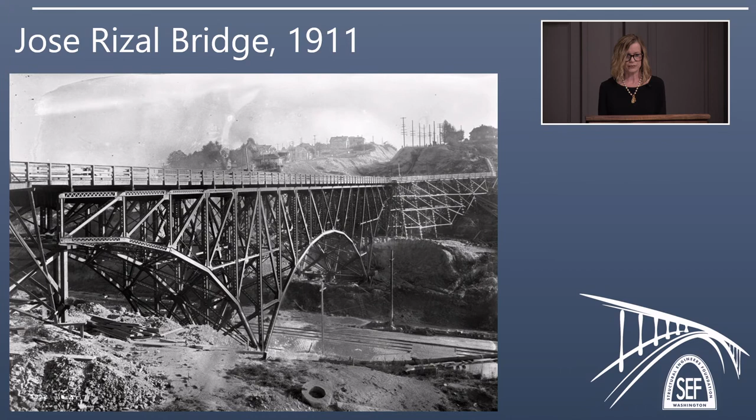Steel was the earliest, but concrete, although widely used later after World War I, we do have an early example concrete road bridge in the Monroe Street Bridge in Spokane. This was actually the third bridge in this spot. There was a timber trestle bridge that stood for a year before burning down, and then a steel bridge stood for about a decade, but it was deemed unsafe. It vibrated and it was sagging in the center.

Now, those two were both high fixed bridges, but we of course have movable bridges, drawbridges, and bascule bridges are the most common type. They are named bascule for the French word for teeter-totter, and that refers to the way that the movable spans are raised and lowered on counterweights. If you've ever driven in a city over a river, you've probably driven over a bascule bridge.

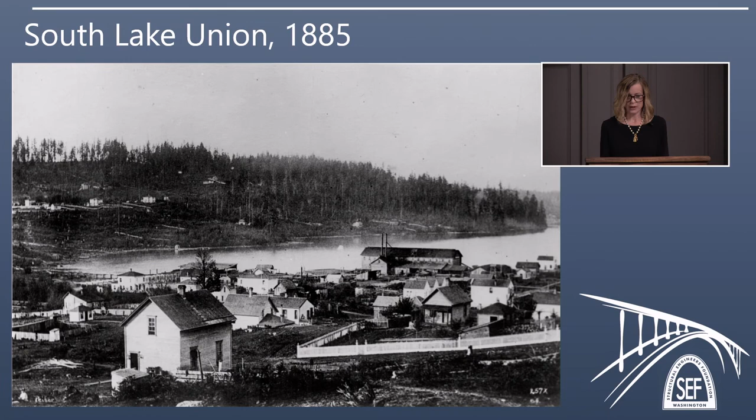The first, Fremont, there had been a bridge at this site since the 1890s that spanned the natural creek that we just saw a photo of, which was the natural outlet of Lake Union. So this bridge was built, this is the second bridge actually, this is not the 1890 bridge. This was built longer to accommodate the canal being dug.

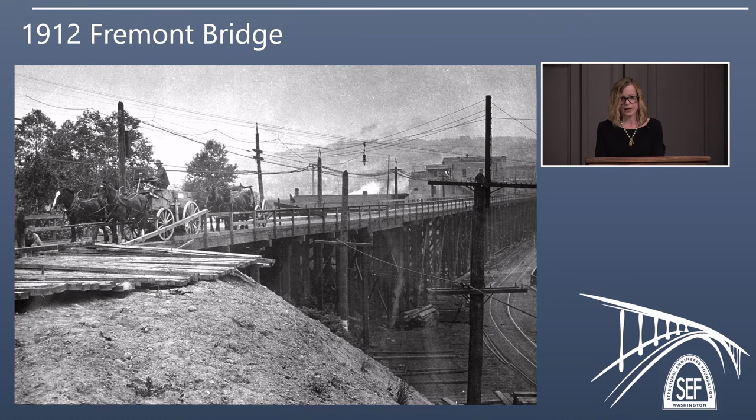In 1911, there was a temporary bridge built at Stone Way that you could see in the distance beyond the bridge under construction here. And it was temporary, but people got so used to using it, they wanted to keep it. They asked the federal government to permit another crossing there, but they said nope, so it had to go. So unfortunately, no crossing there. So 9 months after the completion of the locks, the first bridge was finished, the Fremont Bridge.

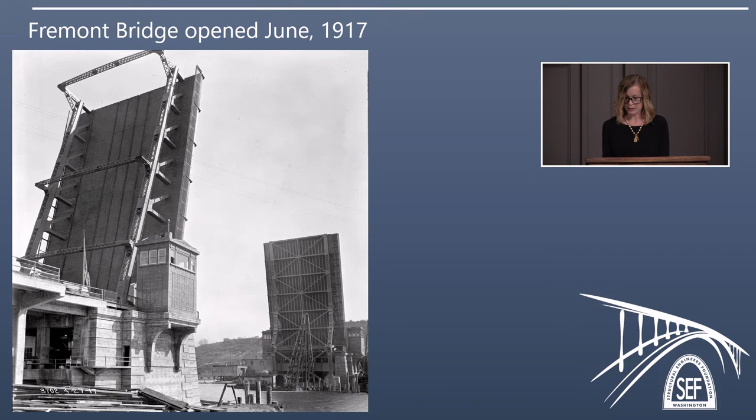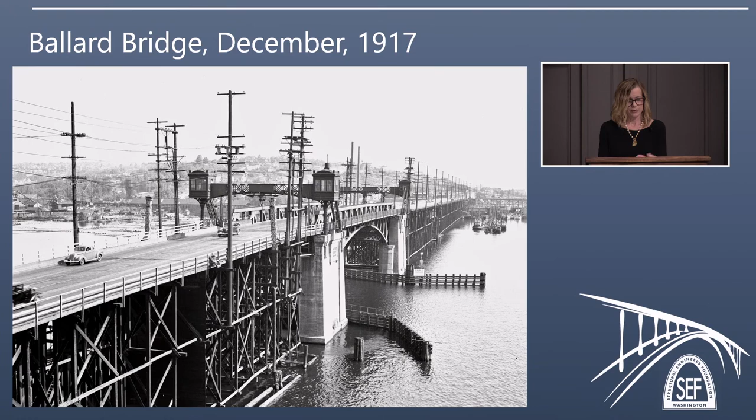So the Ballard Bridge was completed 6 months to the day after the Fremont Bridge was completed. This photo was taken in the 1930s. You can see that there's a timber trestle approach. Those were replaced by the end of the 1930s, but the first 3 bascule bridges had timber approaches until that time. So they were moving along pretty well. They'd opened 2 bridges in 6 months, so progress. However, the University Bridge had a 2-year delay before it would be done. And part of that was controversy over the location.

It replaced the Latona Bridge, which was at 6th Avenue Northeast, and that served an area called Brooklyn, which we now just call the University District, and the University of Washington to the east. And people wanted a bridge that would get them closer to the university. So funding was rejected until they decided on a site at 10th Avenue Northeast, which is where the University Bridge opened in 1919, but that was a costly delay. They had to renegotiate contracts at wartime prices during World War I. So this bridge at $825,000 cost more than the first 2 bridges combined. So it was a costly delay.

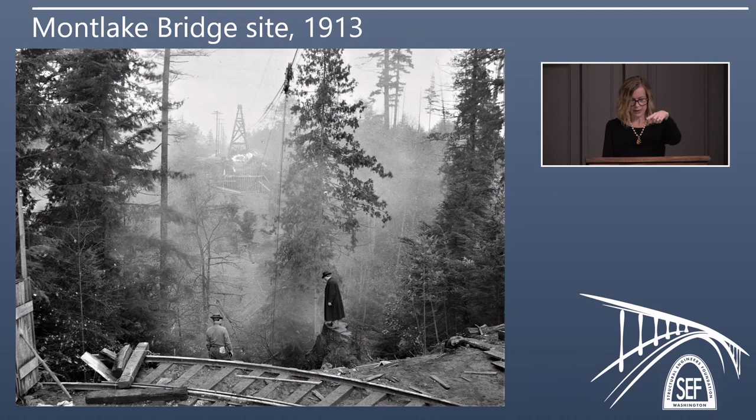So people who wanted to cross at Montlake would have to take a detour of 5 miles, take one of the bridges to come back up. It was very inconvenient. And the area, though, that it served east of the university was growing rapidly. This photo is clearing of Montlake.

Well, class resentment is probably the biggest reason, and that may sound cliche or intellectually lazy, but in 1919, the first citywide general strike in the nation was held in Seattle. So the tension between the working class and the moneyed class and people who lived in these fine homes was very real. And so they had to get creative.

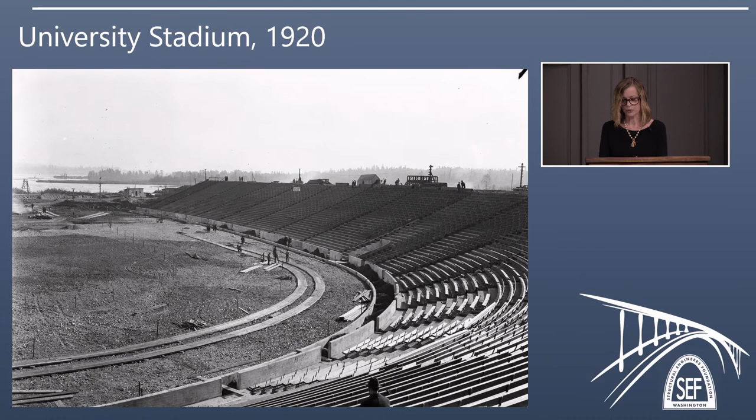So the University Stadium had just been built in 1920. So bridge boosters teamed up with influential Husky fans and promoted it as the Montlake Stadium Bridge. And it didn't pass, a couple more times didn't work, but finally on the 8th try with momentum building for this stadium bridge, it passed in 1924.

So the Montlake Bridge opened in June 1925, proving that you can find common ground to get anything done if you try hard enough. The bridge was stylistically different. The first three were done in a more utilitarian style. This was done in a collegiate Gothic style to match the university buildings, and it was designed by Carl Gould, who also designed the campus buildings. And with the completion of that, it was the completion of a long dream to build the Lake Washington Ship Canal. And John now will talk about bascules.

Oh, thank you, Maureen. That's a fascinating and very interesting description of how we tried to cross that waterway from Lake Washington down to the locks, to the ocean, because clearly that's a big impediment and you need bridges to get over it. I'd like now to turn the page a little bit and look inside some of these bascule bridges and just see how they're built and how they work and what's important to them. There's a few things which are relevant.

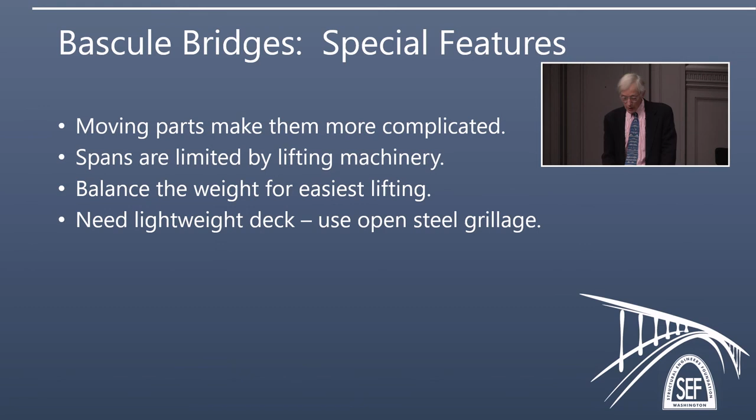One is that they've got lots of moving parts, and therefore in some sense they're like a machine rather than just a fixed bridge. The spans which you can use are also fairly limited by the machinery that you put inside in order to lift them and lower them. As Maureen pointed out, you do need to balance the weight on them, with a counterweight at the back and the span in the front. And of course, the lighter you can make the whole thing, the better off you are, because then the less energy you need to use in all the machinery.

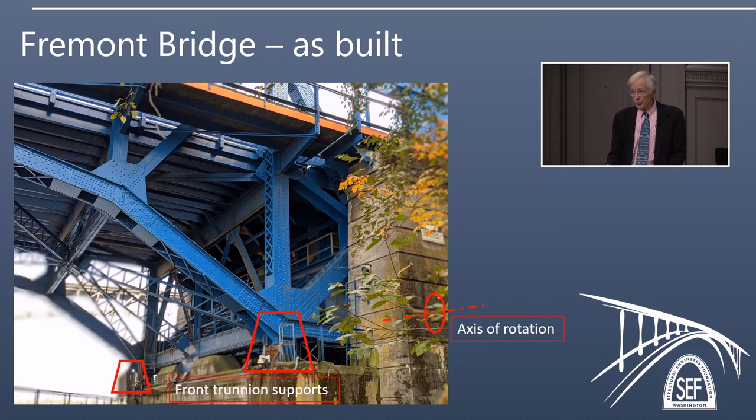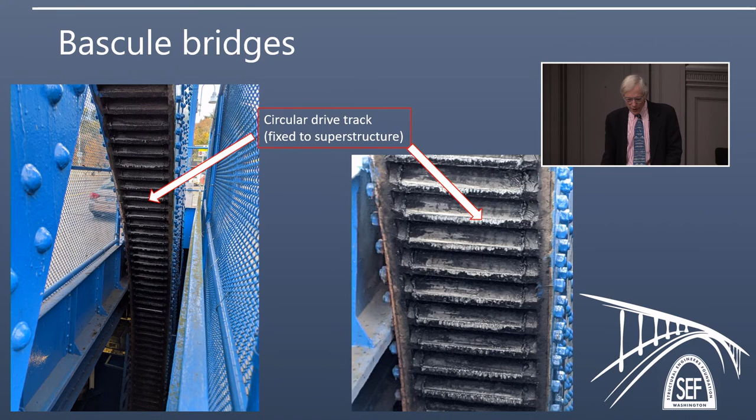parts. You can't readily see inside, but if you drive over the bridge, you can still see the drive track. If you walk across on the pedestrian side, on the west side, you can see these big greasy drive tracks there, and they are indeed the working guts of the bridge.

I think we should take a look at the steel bridge construction in the Bascule era and just see how they made these things. And some of the important technology, when you make a bridge, is that you have to make it in pieces. You cannot just make a whole bridge and drop it in place suddenly. If you make it in pieces, you have to connect them together. And the way you connected them together at the time was using things called gusset plates and rivets, and we'll

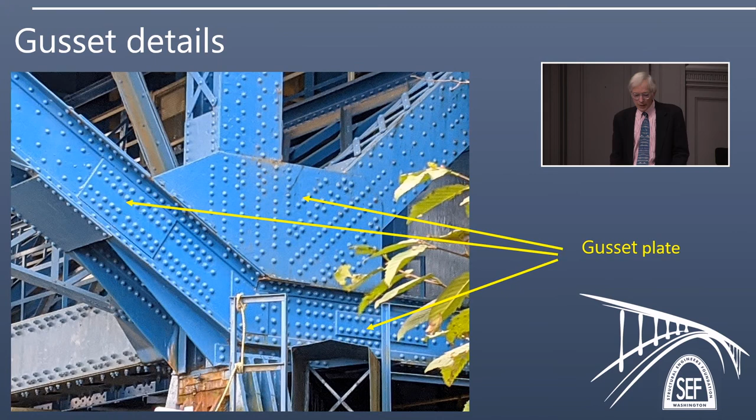And you might think, well, there's only just one, but no, that's not true. There's another little one up here, there's another one down there, and I suspect if we looked hard enough, there'd be a few more in the picture. And really what this goes to show is that the gusset plate business was pretty complicated when you were trying to connect everything together. And all these plates were kind of laid on top of each other in a really fairly artistic, craftsman-like way. So there's really a lot of craft went into building these things.

So the little round things that you see there are not bolts, they're rivets. And we should do a little riveting 101 here, I think, to see how this is all done. If you've got two plates, maybe two gusset plates, that are sitting next to each other and you want to connect them, the first thing you do is drill a hole. Then you heat up a rivet to red heat, cherry heat, and then you put it in the hole.

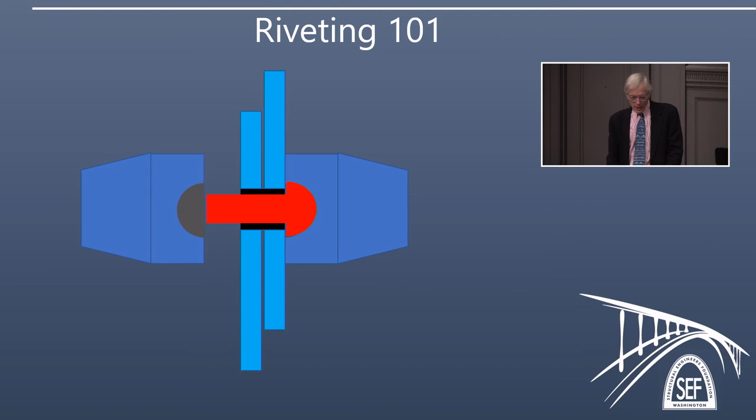Then you bring up a riveting tool, which is a thing like a big heavy hammer which sits behind it on the head side. You bring up another riveting tool on the opposite side, and then you whack it so that you form a second head on the rivet when it's still hot. At that point, you're sort of done. You can take away the riveting tools, and if you watch it, the rivet will shrink as it cools.

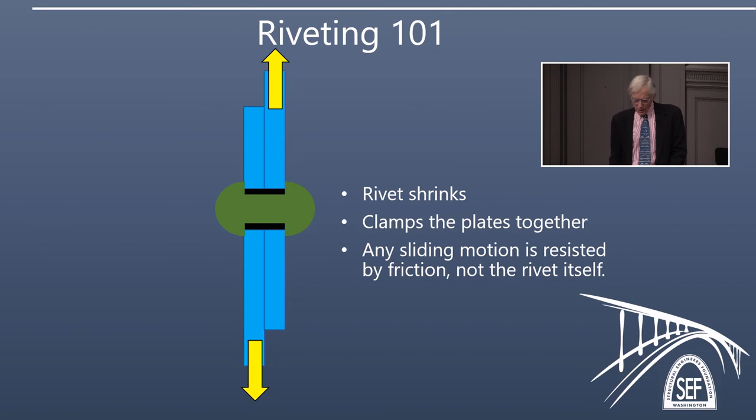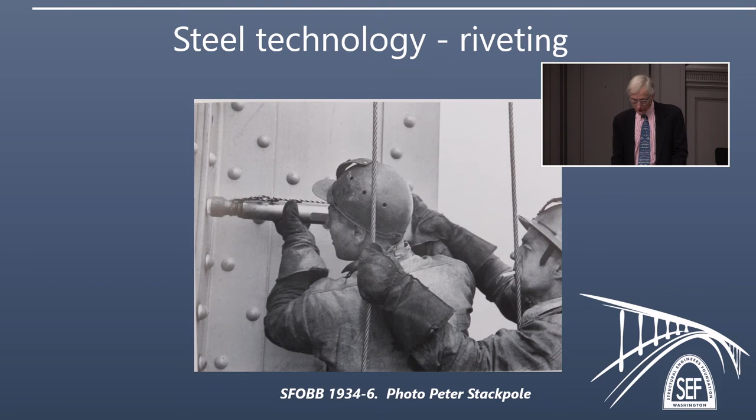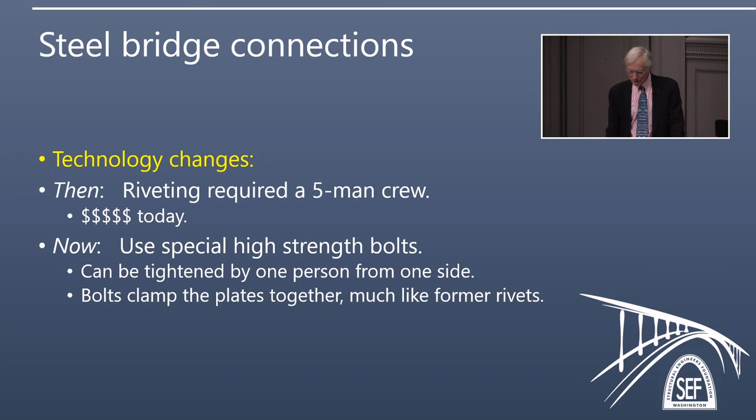Well, if we think about the overall steel bridge design and not just the connections, then there's a few things that stand out. If you're making steel bridges, steel is pretty strong stuff. Therefore, you don't really need very much of it. If you don't need much of it, then the members get to be quite small and skinny. And if you make them quite small and skinny, then immediately you bump into the problem of buckling. So what we find in steel structures is that two of the big problems are, number one, buckling, and number two, the connections. How do you connect the pieces together?

Second thing is, because it's so strong, you really need to put the material only where you need it. And that's why we wind up with configurations like trusses, which seem to have an awful lot of air in them, which is quite true. But you put the steel just exactly where you need it and nowhere else, and that's how you get that configuration. And the last thing is, how do you put these things together?

Well, back then, they put them together in what we would call a stick-built fashion. You bring each individual piece and you rivet it together. Today, it's a more common practice to weld together bigger pieces, to take those bigger pieces out to the site, and then to bolt them together. Because welding is well suited to work in a well-controlled shop, where you've got good weather. Bolting is better in the outside world, where welding is pretty expensive, and particularly crane time is expensive. You don't want to have a crane holding onto a piece for a whole day while you weld it together.

So let's move away then from the bascule bridge world to some fixed steel bridges and just see how they work. And a fixed steel bridge, of course, is a bridge which doesn't go up and down like a bascule bridge does. And a couple of the examples of these are typically slightly later than the bascule bridges were built. They were kind of in the 1930s.

Here's the Aurora Bridge today, and really the thing I'd like to point out here, which may be a little hard to see, is that many of the secondary bracing members here, which don't carry super big forces, are made up of a really delicate lattice work of small pieces all riveted together. And that indicates what was true at the time, which was that basically labor was cheap and material was expensive. And so what that meant was that you bust yourself to try to use as little material as possible, even if it meant making a lot of connections. And that's why you come up with this kind of filigree of fine pieces.

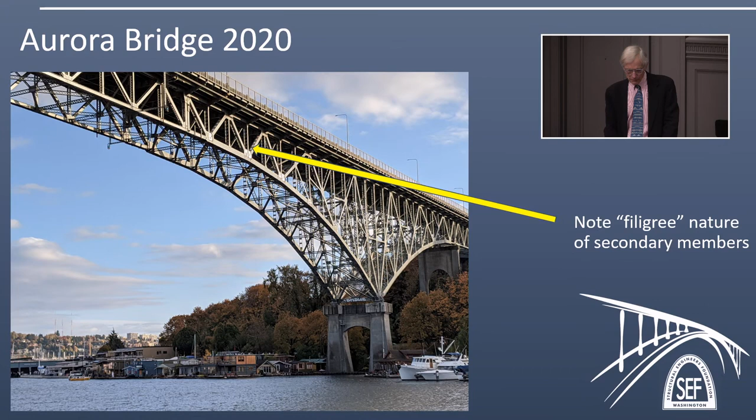I think you can imagine that putting that thing in retroactively meant that somehow you had to pick up the bridge with one hand and then put the bearing under with the other hand and then quietly let the bridge down on it when you were all finished. So just from a construction point of view, that was a remarkable operation.

A couple of other bridges here, Deception Pass, the same kind of era in the 1930s, again built by the cantilever method. And this is a particularly difficult one because the currents under that bridge are wicked as the water flows in and out due to the tides. So if you fell off that bridge, then it was probably a bad outcome.

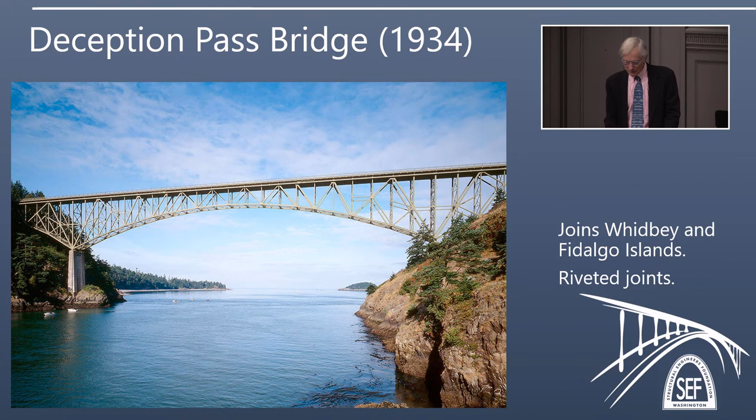So this is, in fact, the longest cantilever truss bridge, continuous cantilever steel bridge in the US, and that is still true today. 1,233 feet on the main span. So that's getting about as long as you can with these things. And we do get another view from what the maintenance crews see when they go up there, and the mist is flowing through on the Columbia underneath.

What a fabulous view. You can notice here also that these secondary cross pieces are not made up of those little spindly filigree pieces. They're made out of solid beams with holes cut in them. And here what we're seeing is that the cost of labor and material have started to switch over, and so it becomes more economical to just take a rolled steel beam, chop a hole in it to keep the weight down, and then put it in place.

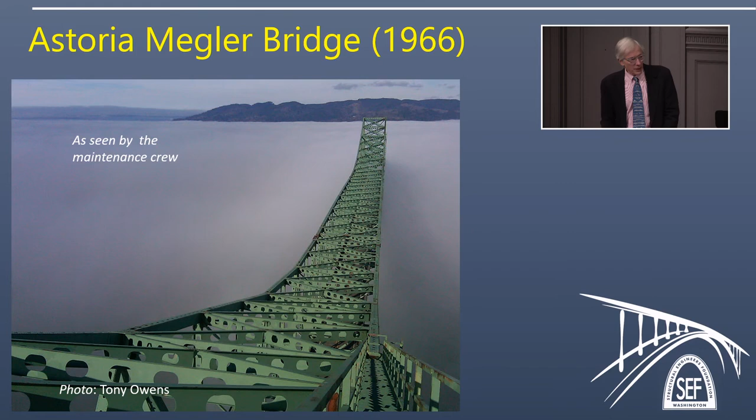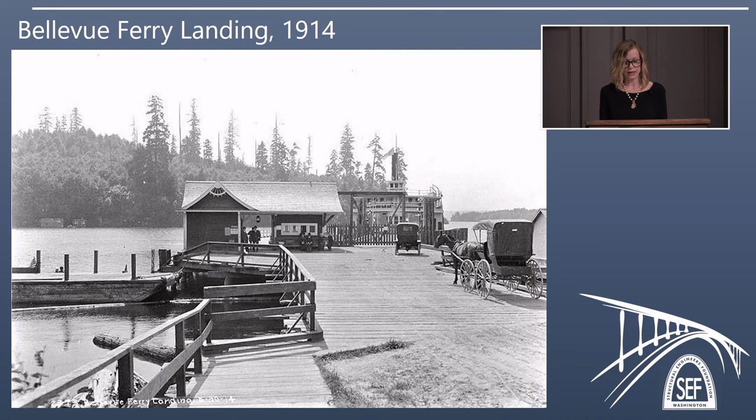And here is a horseless carriage followed by a horse and carriage waiting to get on the Bellevue ferry. If you did have a car, you could drive to Seattle, but you had to take a 26-mile, 1-hour trip around the south end of the lake and back up north to the city. There was no vehicle access to Mercer Island. And the area of Bellevue and Mercer Island were very, very rural. This is right what was up behind that ferry landing.

Farms. The economic center of the east side was Kirkland. They had woolen mills and shipbuilding in Kirkland, but Bellevue was strawberry farms and agriculture, very sparsely populated. After World War I, Mercer Island was considered a prospect for residential developments if only you could get a car there. So they built the East Channel Bridge connecting the northeast side of the island to Bellevue. And this is the same area where the I-90 connects today.

And this did increase the residential population a bit in the 1920s, and there was some interest among islanders for a bridge across the lake to Seattle. But it was problematic. The lake's very deep, muddy bottom, so a traditional bridge on piers is problematic, and there just wasn't enough interest. This gentleman, Homer Hadley, though, he was way ahead of them. He first proposed the idea in the 1920s.

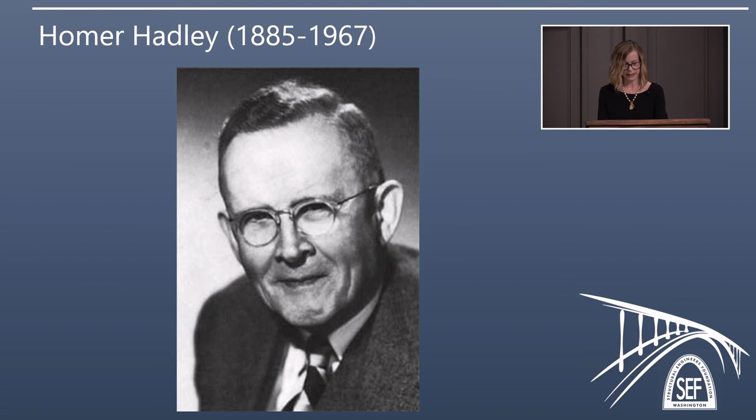war was happening in Europe, and the United States was dealing with the Depression, and Franklin Roosevelt's administration started the Works Progress Administration, and they made an offer to pay for 40% of the cost of the highway bridge, and the rest could be paid off by the state tolling authority. And despite his opposition to FDR and the spending, Hadley saw this as an opportunity to realize his dream. So he proposed the idea to Lacey Murrow, and that's that gentleman there.

He was the director, state highway director, and he convinced him that it would work, and he assembled a team of the best engineers in the state, and this is them posing as the shovel crew. Now, the WPA offer was set to expire by the end of 1938, and they proposed a tunnel through Mount Baker, which of course is where it is, but people didn't want it. People didn't like it. They had the NIMBY problem, and so there was debate over the location, and the federal government said, enough already, build it, or else we're going to revoke funding. So they broke ground on it 2 days before the end of 1938, just in time.

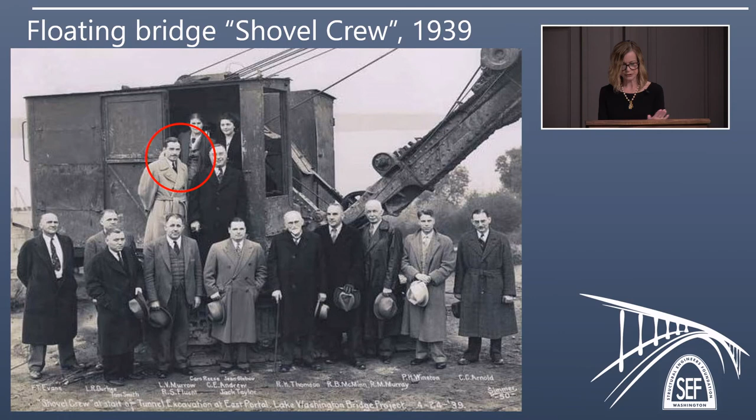But Murrow asked Hadley to stay out of the public limelight of the bridge because of the Portland Cement Association. He would see it as conflict of interest. He said, you'll get credit later after it's built, just keep quiet for now. And it opened in July 1940. Its floating span, 6,620 feet, was the longest floating structure in the world when it was built, and the first floating bridge made of reinforced concrete. And it cut travel time from 1 hour to 7 minutes from the east side to Seattle. And it was a resounding success.

The bridge became an attraction in itself. People would come just to drive over the bridge, but it also sparked a massive amount of growth on the east side, particularly after the war. Between 1940 and 1950, the population and property value at Mercer Island increased 300%. It was so popular that the toll was paid off 19 years early. And in this photo, Governor Langlie is taking a ceremonial last toll from a KOMO News reporter there. But the growth was really concentrated in Bellevue and Mercer Island. And by 1948, Kirkland, further north, wanted another floating bridge to serve their community. But it would be another 15 years before it was built.

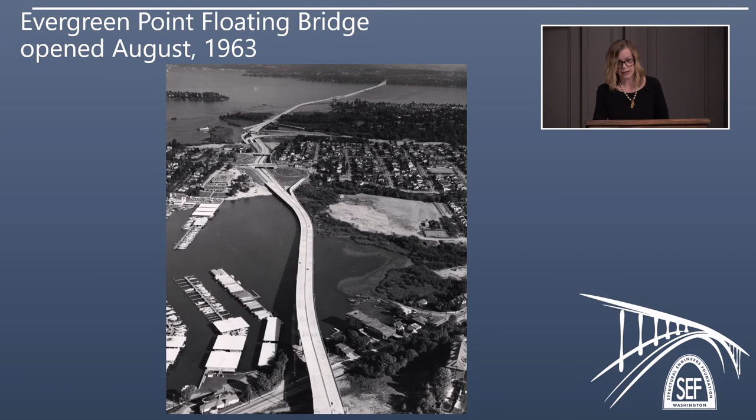The funding for the Evergreen Point Floating Bridge was approved in 1953, but debate over location once again went on and on. It finally got whittled down to two possible locations, one being at Sand Point, and the other at Montlake to Evergreen Point. And this route was preferred by the Navy. They didn't want the bridge so close to Sand Point. And it was preferred by Governor Rosellini, so that's the one they went with. And there's Governor Rosellini with the giant novelty scissors, cutting a standard 1-inch ribbon.

And it did deliver the growth that they had hoped. It paid its toll off even sooner than expected, 21 years early. It was supposed to be paid off by 2000, and it was paid off by 1979. But the traffic relief that it was supposed to have created was totally erased by the population growth. So in 1989, a third floating bridge was constructed directly adjacent to the first one. After that third bridge was in place, they went about refurbishing the original bridge at 50 years old.

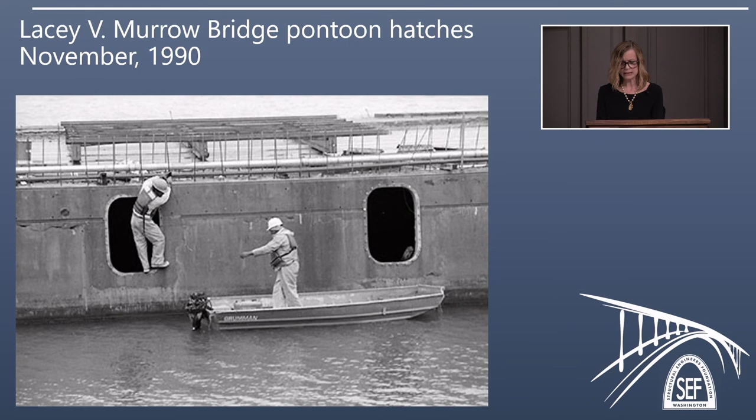They were refurbishing the pontoons, and they left these pontoon hatches, you can see there, they left those open over a Thanksgiving weekend in 1990, and it happened to be a very blustery one. A storm came in, and those open hatches got filled with water. Workers attempted to pump the water out, but it was too late. One pontoon sunk, and then they all went down like dominoes. So the Lacey V. Murrow Bridge floating section had to be completely rebuilt.

So here it is as it is today. You can see on the right the Lacey V. Murrow Bridge, the only original feature being the approach, the steel through arch approach, and the Homer Hadley Bridge, the 1989 bridge, named for Homer Hadley, who finally, 22 years after his death and 49 years after his bridge was built, got his due credit.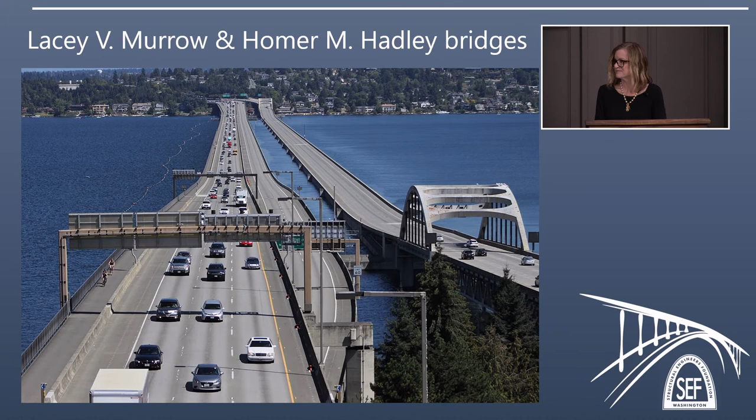So now I'll pass it over to John.

Thank you, Maureen. On a historical note, it was shortly after I first came to Seattle that I remember crossing the Evergreen Point Bridge and having to pay the toll. And at that time, there was nothing electronic at all. As you went over the bridge, there was a basket, and you tossed your dime into the basket as you went. And the trick among the slick people was how fast could you go while you tossed your dime in there and still get it in the basket. But that didn't last long.

So if we go back to the question that Maureen originally asked, which is what are the conditions which would persuade you to build a floating bridge? And I think the answer is pretty much this. If you have a long bridge that you've got a wide body of water you've got to get across, it's deep and it's got a very muddy bottom on it.

What that would mean is that the columns that you'd have to put in for a conventional bridge would be enormously tall and they would be enormously expensive. And so this is really where the floating bridge comes in. You simply put the bridge deck down on the water, you make it a hollow box so it floats, and then you're off and running, and you can do it a lot more cheaply.

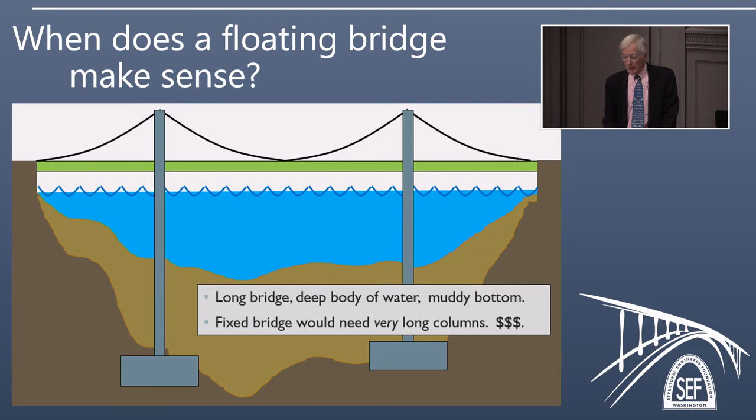Well, you might be suspicious and say, I don't think concrete floats. Do these things really float properly? Well, the answer is if you put enough air inside it, you can make anything float. And that's exactly the principle that we use with the concrete pontoons. And of course, we use it for ships. Steel ships have been around since the middle of the 19th century, and they float, and steel's heavier than concrete. Why do we make it out of concrete rather than steel like a ship? Basically because the concrete solution is cheaper.

We've also had significant experience with these things. Homer Hadley himself was doing it during the World War I era. And a good reason for making ships then out of concrete was that they were non-magnetic. And people were running around with magnetic mines, clamping them onto steel ships and blowing the ship up. And of course, you can't do that with a concrete one. We make things like LNG, liquefied natural gas barges.

They are giant floating platforms. Docks the same. And even the UW ASCE has a concrete canoe team. And they make concrete canoes which they paddle and race in. And those things are incredibly light and thin.

So if you look at the Lacey V. Murrow Bridge, which is known in the trade as the LVM, to the cognoscenti, it basically looks like a giant box with some internal dividers. It's kind of a 3D egg crate, if you like. This is what it looks like inside.

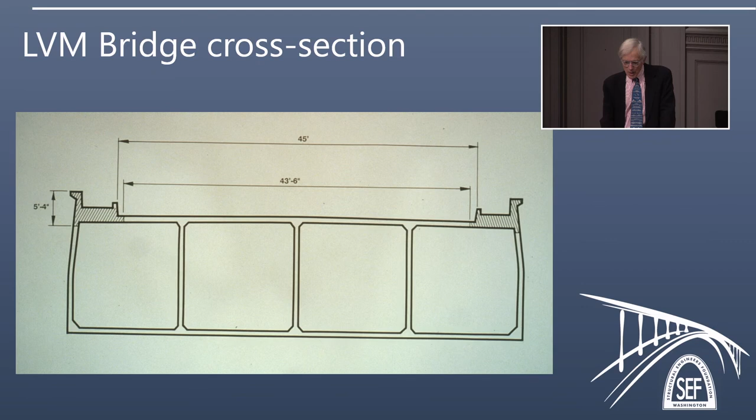There's a few things you have to worry about, like movement of these bridges. And the first one is, what about longitudinal movement? The bridge is roughly a mile long, and from summer to winter, this is what it does. It gets longer. And it gets longer by something like 3 feet. And therefore, you have to make allowance for that elongation at the ends by having joints which will accommodate this kind of elongation and obviously the contraction in the winter when it cools down again. So you need a big expansion joint, and those alone cause their own share of problems.

Transversely, i.e. across it, what do we do there? Well, the problem is that if you don't anchor it down properly, the bridge might blow away, or it might be carried away by the tide or the current. And certainly in Hood Canal, it's tides, and in Lake Washington, it's mostly winds. And there are a couple of floating bridges in Norway, and they are usually at the mouth of a fjord, and of course there's a river coming down there, and in that case it would be the river current that you have to anchor them against.

So we put in anchor cables, and these are fairly flat, nearly horizontal. And at the far end, there's a couple of different types of anchor that you can use. And one is what we call a gravity anchor. And crudely, that's just a big bucket full of rocks. It's very big and there's a lot of rocks in it. And that works very nicely if it's sitting on competent soil.

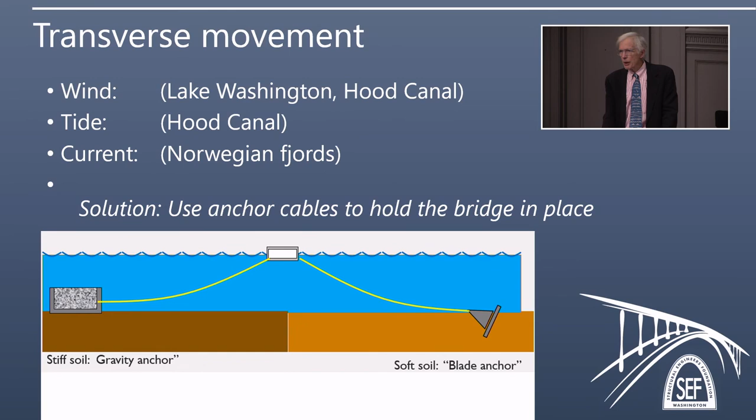If the soil is very soft, then the bucket of rocks would sink into the soil and move around. And so there, typically what you would do is use a blade anchor, which is more like the anchor of a ship. And it cuts into the soil, and then it picks up a lot of weight of soil.

At the other end of the anchor, inside the pontoon, you need to fix it there. But you also need to make some space for adjustment. And so what you have here is a long red track, and there's kind of a movable dolly essentially in the middle of it, with the end of the cable attached to that dolly by a clevis.

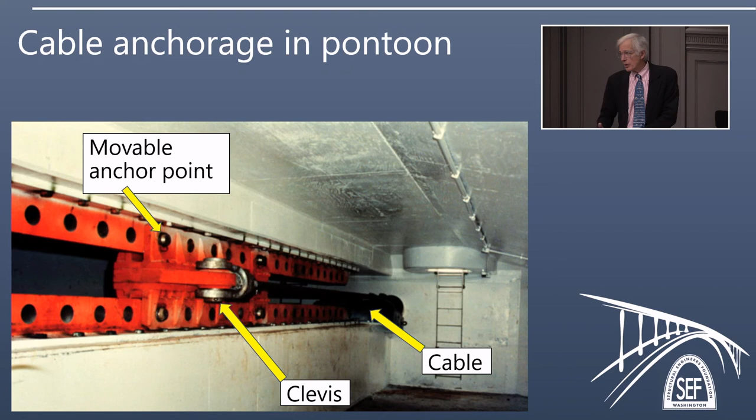And if you want to move it, you undo the bolts which are holding the dolly to the track. You put a big jack in behind it, you pump up the jack and you move it to where you want it to, and put bolts in the new place. And in that way, you can adjust the length of the cable and the tightness of the cable.

The last movement you might be worried about is vertical. And how do we deal with that if you've got these anchor cables there? Surely they would hold the bridge down and sink it if the tide moved up too far. If you look at the vertical change in water level, in the lake it's not too bad. It's around about 2 feet. And this is adjusted by the Corps of Engineers by messing with the lock height.

In Hood Canal, the tide is something like 12 feet from top to bottom. So that's a much more serious problem. But in both cases, what you can do is if the tide goes up, if you make the anchor cables flat enough, then the change in length of the anchor cable is actually very small as the tide goes up or the current goes up.

So what happens to these bridges? Well, unfortunately, we've lost 2. When I came to the state of Washington, there were 3 floating bridges here. And since I've been here, 2 of them have sunk. And I assure you those 2 events are not related. I had nothing to do with their sinking.

The Lacey V. Murrow Bridge went down, as Maureen pointed out, in a big storm on Thanksgiving Day. And there was actually a perfect storm of events then. As they were trying to retrofit the bridge, they were cutting some of the deck off by using hydrodemolition, where you use very high pressure water jets to cut the concrete. That meant that the water was contaminated, so they were forced to store it somewhere and then pump it away later. So they were storing it actually in the bridge, because where better?

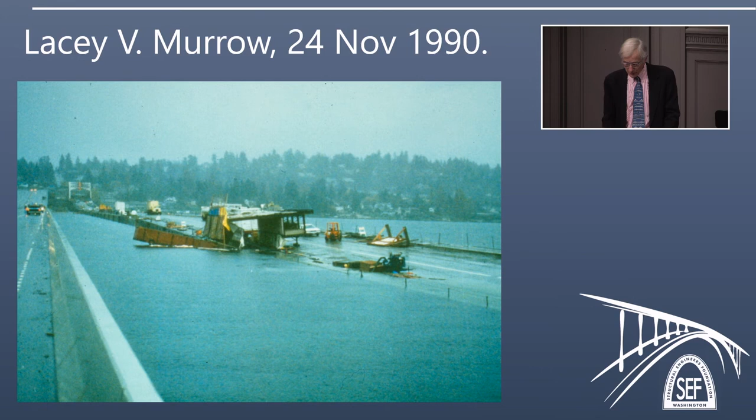The second bridge that went down was the Hood Canal. And this went down in February 1979 in a particularly heavy storm. And what happened there was that there were hatches on top of the pontoons for access so you could get inside to inspect them. Those hatch covers blew open as the water was washing over the pontoons. And as they blew open, of course, the water got into the pontoons. And you know what happens if you fill a concrete box with water when it's meant to be floating. So this bridge also, we lost half of that bridge.

So those are the kind of ordinary problems that you have to deal with if you own a floating bridge. There are some special problems which come up, which we can look at, just a couple of them now. And one of them is that in a floating bridge, it will move up and down with the water level. That means that you've got to get from the fixed part of the bridge, which is on the land, to the floating part, which is going up and down.

And this is exactly the same problem that you have in a harbor when you have to get from ship to shore. You need a gangplank. And you'll get rotations at each end of the gangplank as the water level goes up and down. And we can see that here as the water goes down, the gangplank has to rotate. This is fine if you've got rubber-tired vehicles. They can deal with that little sharp kink at the end because it really is not that sharp. You don't even notice it as you drive across.

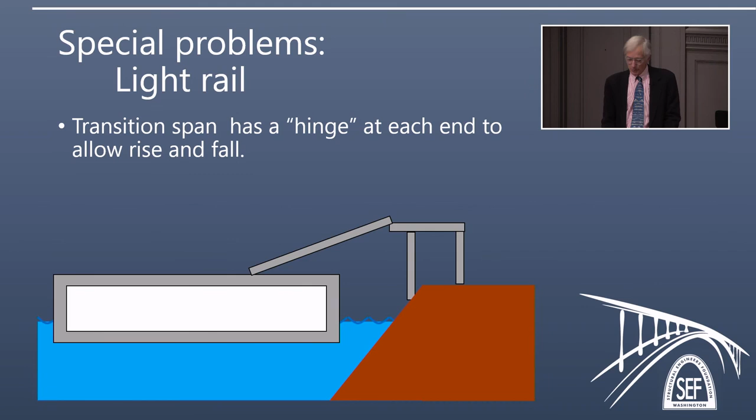Andy is actually a rail track consultant designer from Britain. And he was sitting in Starbucks one day, this is the story he likes to tell. And in Starbucks, he was playing with some coffee stirrers and wondering about this and that. And apparently at this moment, he dreamed up the idea of making what he called a caesura track bridge. Well, caesura is an acronym, and I can't even remember what it stands for now.

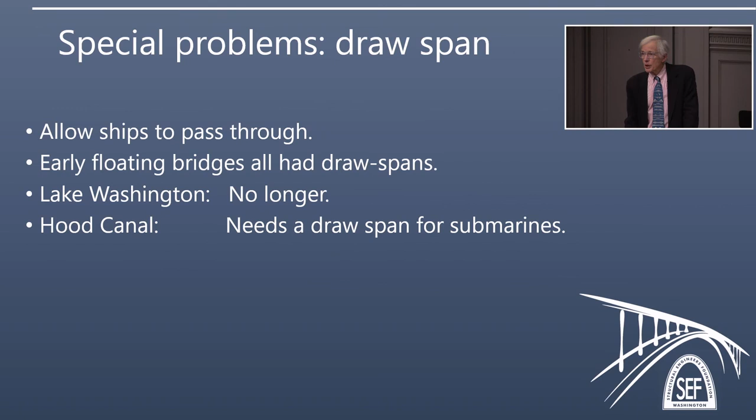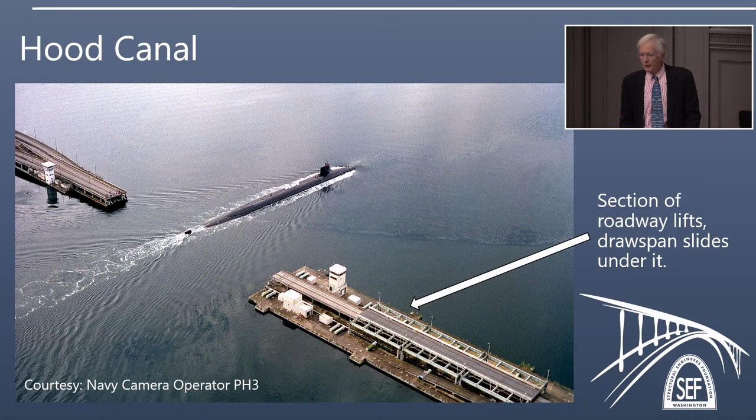So I think you now know everything about floating bridges, so we should move on and look at another different type of bridge, which I will go straight ahead with here, and that's pre-stressed concrete bridges. And these are very, very common in the state of Washington. They're actually common over the whole country now, and they're really the workhorse bridge for medium-span bridges in the kind of 70 to 200 foot range.

These pre-stressed girders seem to do a wonderful job because they're economical, they're very durable, you really don't need to do much to maintain them, and therefore they have very low life cycle costs. And this is the main reason why they've become so widely used across the country. They were started in 1952, and we're still using many, many, many of them today, and they pretty much started in the state of Washington.

For those of you wondering what pre-stressed concrete is, let's just try and put the course into 30 seconds here. If you have a regular reinforced concrete member, like a beam, and you load it with some gravity load, you drive a truck across it, then the beam will bend, and on the tension side, which is the bottom, the concrete will crack. Now, that is not remotely unsafe, because you have already put steel reinforcement in there to carry any tension forces. So from a safety point of view, it's just fine.

But on the other hand, when the concrete cracks, it does two things that you don't really want. One of them is that if the concrete cracks, the member becomes a lot more flexible and the deflections become bigger, and that may become a problem. The second is that with cracks, water and de-icing salts and other nasty chemicals might get into the cracks and eventually corrode the steel, and that would be a safety problem.

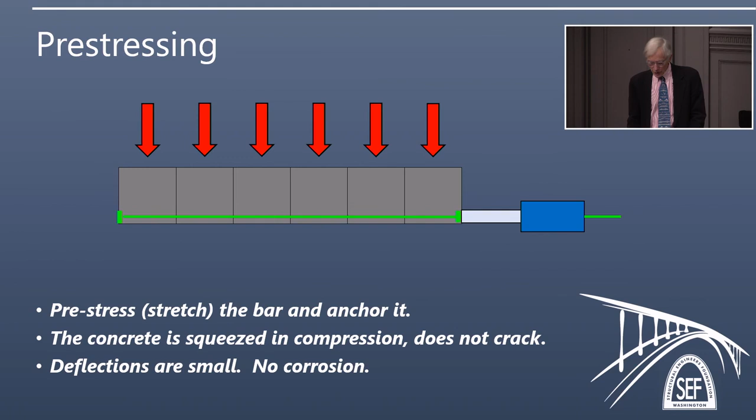So what you can do is pre-stress it. And what you do is you put a cable through the concrete, and then you put a jack on it, and you pump up the jack, and you put a big stress in that cable. You then come along and put an anchor at the end where the jack was, and then you can throw the jack away. And what you're left with is some concrete which is pre-compressed by having this tension cable through it. If you imagine, it's a little bit like having a bunch of kids' blocks with a rubber band which is stretched tightly around them. They're squeezed together and the rubber band is in tension, and so far you've got no load on it.

Now the good thing about this is that it delays the onset of cracking very significantly, and that massively changes the performance of the material. And again, it's one of these ideas like Andy Foan's Cesura. It's really clever because it's really simple.

Now, like all these people, Art was, I think the way to describe him is a highly intelligent, visionary knucklehead, because he was the kind of person who, if you wanted him to do something, all you had to do was say, Art, you know, I don't think this could be done. And he'd kind of grit his teeth and he'd go off and he'd do it. Whether you thought it was possible or not, he would make it happen. He was that kind of a guy.

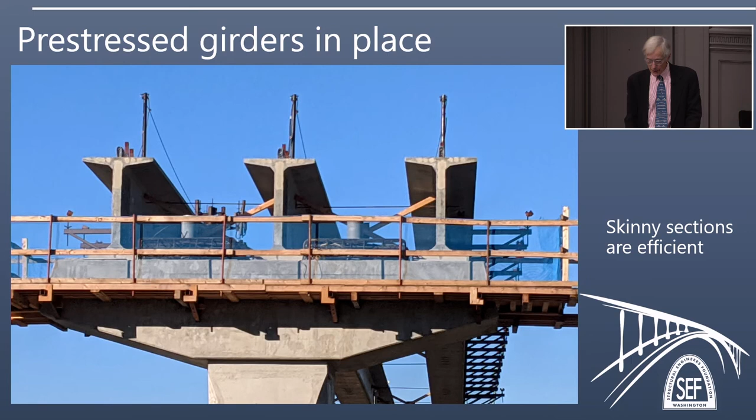What they then do is they put the form together around these cables, cast the concrete. When the concrete has set up and hardened, they let go with the jacks. The cables try to shorten, but because they are now bonded to the concrete, which surrounds them, they can only shorten a very small amount, and the whole thing comes to equilibrium with the concrete in a lot of compression and the cables still with a lot of tension in them.

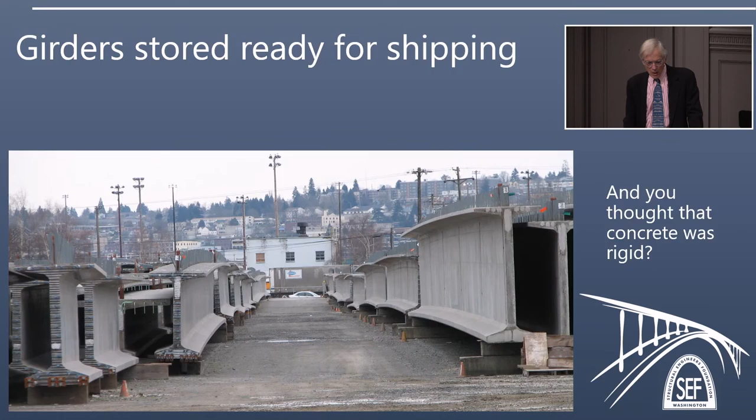Well, after you've stored them, you have to ship them to site. And these things are getting big. There's no way that you can get them on a normal flatbed truck. They're way too big and too long. And the one that you see here is something like 150 feet long. So the way that you transport them is you put them on a special rig, and you have two trailers. One's the front trailer, and one's called the rear trailer, for obvious reasons.

And each of those trailers has a lot of wheels anyway, just because the weight is so big that you have to spread the weight over an awful lot of tires so that you don't overload any of the roadways or bridges that you're crossing. And then the girder simply spans between the front and the rear trailer, carrying its own weight, because it's perfectly capable of doing that. You put a tractor on the front and off you go.

And they are barreling along the highway at 60 miles an hour, and they've got a concrete girder weighing something like 100 tons about 2 feet above their head. And frankly, rather them than me, and I hope they get paid a lot of money for doing that, because it seems like a very dangerous and skillful job.

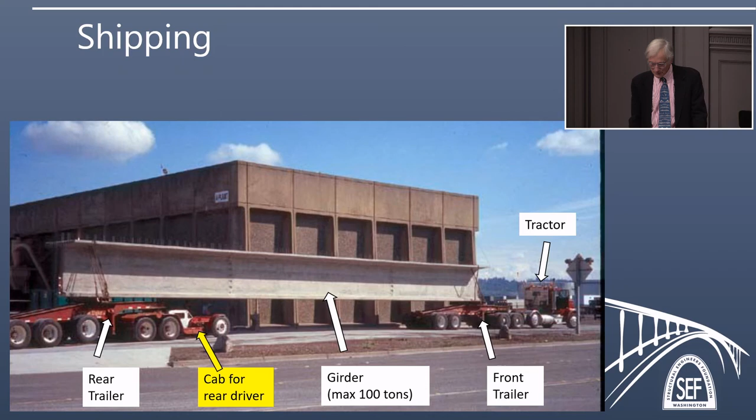Then when you get to the site, you take them off the truck, off this trailer system, quite carefully, and then you simply erect them on the bridge. In that sense, they're a bit like a steel girder, in that you can simply put it straight up there. You don't need any wet concrete there. You just put the girders straight up.

You do see things that look like bits of orange rusty metal on the side. These are brackets which will hold the formwork, because on top of these girders, they will eventually cast a field cast concrete slab, because this is again Sound Transit up at Northgate. They need a flat slab to put the rails on. So that's what will happen. That's what those brackets are for.

So I think that's probably quite enough about pre-stressed concrete. We should move on and talk about another type of bridge, which Maureen will introduce you to, which is the Pasco-Kennewick Bridge. Pasco-Kennewick, yes, thank you, is two of the three cities that make up the area we call Tri-Cities, the third being Richland. Pasco and Kennewick are across the Columbia River from each other.

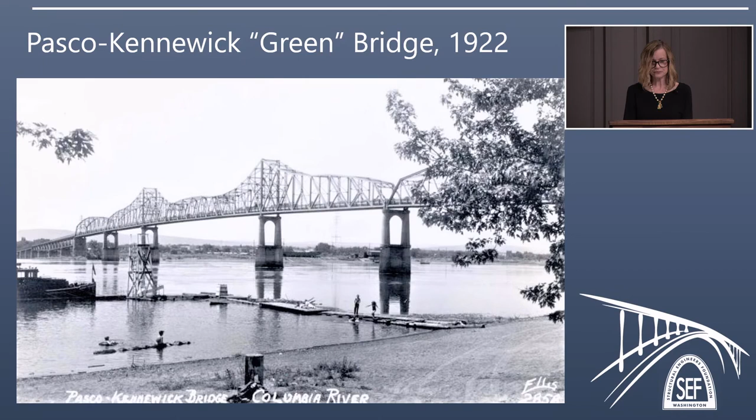You can see here it crosses where the ferry route was, and in fact there is a grounded ferry over there on the side, on the right. And it served both communities very well, until about 1940, when the construction for McNary Dam and the Hanford Nuclear Facility really started creating a population boom and a traffic boom, and the old 2-lane bridge became very congested and dangerous. They'd even treat it as a one-way bridge at times because it was so narrow. They'd let a car pass and then another car pass, so it could be quite a mess.

So in 1954, it was time to bust out the novelty scissors again for the opening of the second Pasco-Kennewick Bridge. It was built about a mile upriver, and it connected U.S. Highway 395. It did, however, divert traffic away from the city centers of Pasco and Kennewick. The Pioneer Memorial Bridge, nicknamed the Blue Bridge for the color of its steel through truss, is a 4-lane arch truss bridge. It was the first steel tied arch design in the state. It definitely improved conditions for driving, but it did decrease traffic into the cities of Pasco and Kennewick.

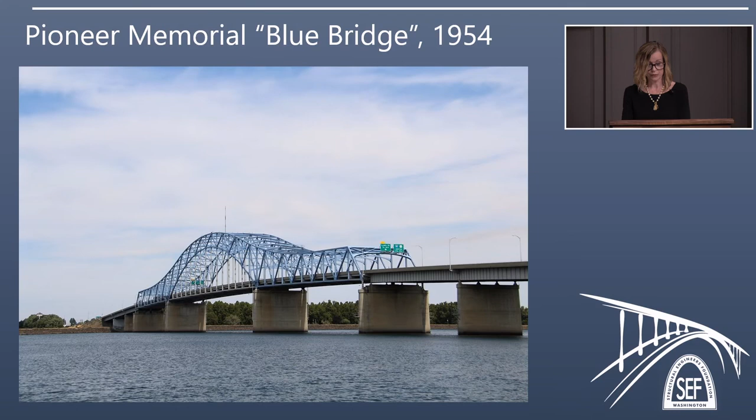So a gentleman named Ed Hendler, who would later become mayor, was actively trying to get the old green bridge fixed up, or even have another bridge built next to it, to try to bring people back into their community. However, there was just no funding to be found for it. Then in 1967, the Silver Bridge collapsed over the Ohio River, killing 46 people. The federal government started the National Bridge Replacement Program, so the federal government would pay for 75%

for a new bridge. Hendler, as I mentioned, wanted to do a second 2-lane bridge next to the 1922 bridge. But the Army Corps of Engineers said that its 13 piers in the water were too much of a hindrance for navigation. They wanted a 4-lane bridge with only 2 piers in the center lane of navigational traffic. So then in came this gentleman, Arvid Grant.

He was a Latvian-born engineer who came to the United States and settled in Olympia in 1951. And he had experience in Europe and post-war Europe with cable-stayed bridge construction. They were used to replace bombed-out bridges. And he really wanted to bring this technology to the United States. And this was the opportunity of a lifetime to cross a mighty river like the Columbia, as he put it, as a once-in-a-lifetime dream for an engineer.

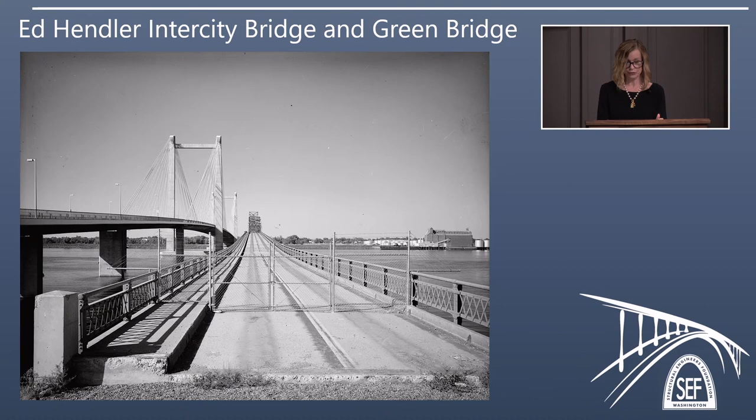It's unclear if the new bridge really helped with the economic benefit to those cities, because of Hanford, the area has sort of a cycle of boom and bust, depending on what the government is willing to fund. But their economic constant is, and always has been, agriculture. But the bridge nonetheless made the crossing much safer and gave them a very beautiful landmark. Here it is at night.

It was the first cable-stayed bridge in the United States. It was the second longest in the world when it was built in 1978. And it ushered in a new era of construction of cable-stayed bridges all over the United States. There's a new one that pops up just about on a yearly basis, and it was so appreciated that in 1985, President Reagan awarded it the first ever presidential award for design excellence, and it is the most recognizable Tri-Cities landmark. And to explain how they work, I'll hand it over to John.

Well, thank you, Maureen. It's a very handsome bridge. If we take a very quick jog back into history, the idea of a cable-stayed bridge is not new. A gentleman called Fausto Veranzio built one in Venice, but clearly not out of high-strength steel cables, way back in the 16th century. A few were built at different times in different variations during the 18th, 19th, and early 20th century, but they really got a boost, as Maureen was pointing out, after World War II.

And there were three conditions that came together at that time. One was that pretty much all the bridges over the River Rhine had been bombed out by the Allies during World War II, so they desperately needed bridges rebuilt. The second was that there wasn't much steel around because it had all been used in the war effort. And the third was that there was a lot of ex-Luftwaffe engineers who no longer had jobs because the Luftwaffe had been disbanded by the Allies. So what you had was people with slick engineering skills and a real need for bridges, but very little material. So what do you do? You make a bridge which uses very little material and solves the problem. And that's exactly what happened.

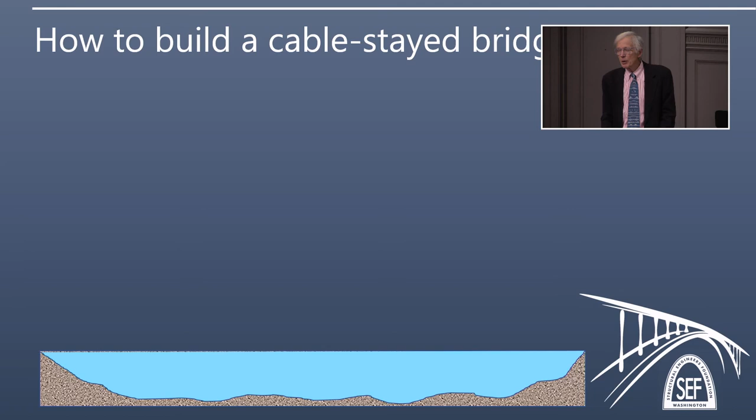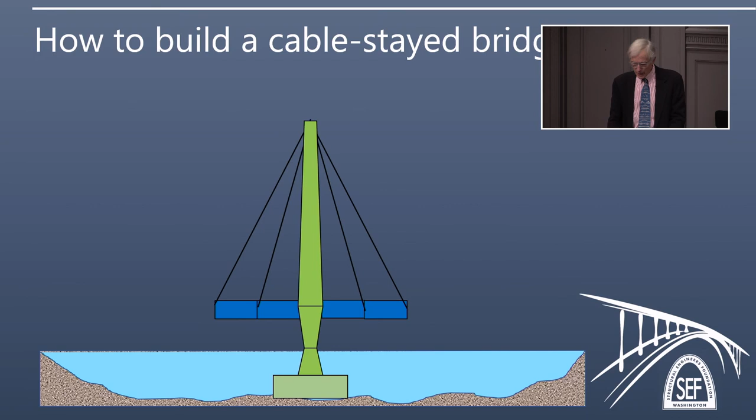So you start with the Columbia River, and you come and put a column down in it, or two as the case may be. You then put a cable down, and then you build a short piece of deck. You can either build it prefabricated and float it in on the barge, which is a common way of doing it, or you can do something else. Then you do the same on the other side, and you balance the weight on the column. Then you do the same on the first side, and then the second side, and then you get bored of doing it individually, and you put them all up. So basically, you're putting a cable and a section of deck in, one after the other.

And you may be familiar with, for example, the Port Mann Bridge, just behind Vancouver, BC. That was built in exactly this way. That's one of the bigger ones. What do the forces look like? Well, it's a fairly simple arrangement. You have tension in the cables, not surprisingly. You have vertical compression in the tower. Again, not surprisingly. That's the way all the weight is eventually coming down.

What you get, which you don't particularly want, is a lot of compression in the deck. And this is kind of the price that you pay for having the tension in the cables. The deck is typically made as light as you can make it, because you don't want to have cables heavier than you have to. And typically what is done today is to have a deck which is supported on steel, either beams, or in this case here, a kind of trusses which go transversely across it, and then a concrete deck which is cast on top of that.

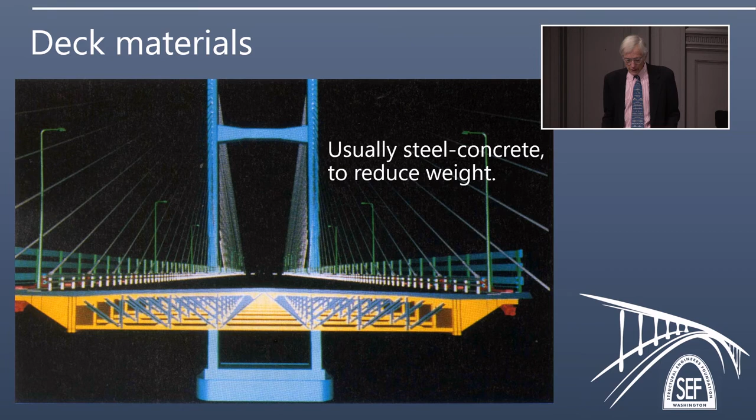And this is all done in an effort to make the pieces modular, so you can bring them in on a barge. You bring in whatever it may be, 20, 25 feet length of deck in a big piece, lift it all up on a crane from the barge, and then anchor it to a cable and go off and get the next piece.

The bad news that we mentioned was that you have compression in the deck. And this actually gets bigger the closer you get to the tower, because all of the horizontal components of these cable forces are all adding up. And by the time you get back to the tower, there's some quite big horizontal forces in the deck. We are trying to make the deck light and as skimpy as possible so it doesn't weigh too much. So you have to be careful about buckling questions and material failure questions, and that's just one of the things that you have to deal with when you design a cable-stayed bridge.

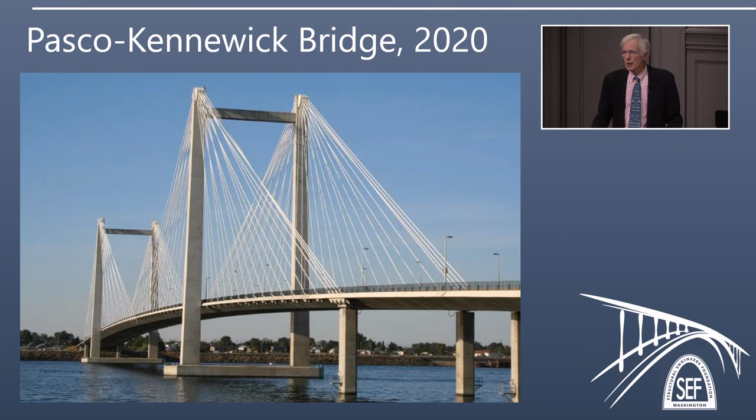So I think that's probably all we need to say about cable-stayed bridges, except here we are looking at Arvid Grant's bridge again. Very handsome, very famous. And perhaps we should go on now to another bridge which is not famous, but infamous, and let Maureen talk about that one. Okay. Thank you.

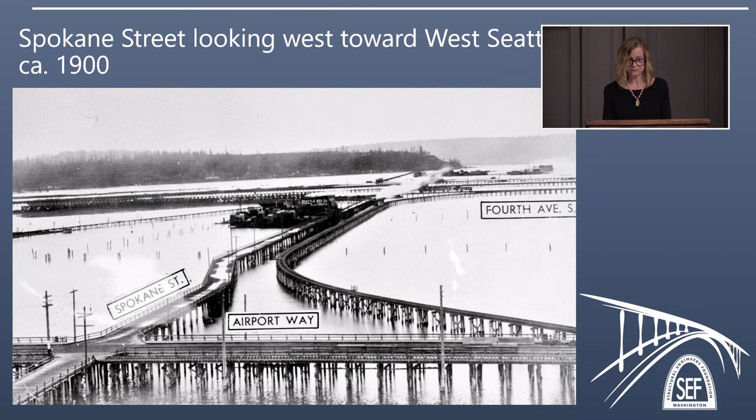So the waterfront, the industry was on the waterfront. All of the residential and business community was up on the top of the bluff, and West Seattle was its own separate city until it was annexed by Seattle in 1907. So access was by steamer and ferry service until 1902, when the first low swing bridge was built at Spokane Street. And a couple years after annexation, the city built a new Spokane Street swing bridge.

And part of the main reason that West Seattle voted to be annexed by Seattle was infrastructure concern. They wanted the electricity and water. And so to save on cost, the city used, you can see on either side of the bridge, those pipes. And that is how they carried the water supply to West Seattle. So every time a boat came along and the bridge had to open, they would turn off the water supply and uncouple the pipes. And so people in West Seattle couldn't turn on their water. It was a considerable nuisance that got worse as traffic increased and boat traffic increased.

So by 1916, the community was calling for a high fixed bridge that would deliver residents, commuters, up to the bluff where their homes were. But instead, in 1918, the city built a second, slightly higher bridge to be there on a temporary basis. It's just until they figured out what replacement they were going to put there.

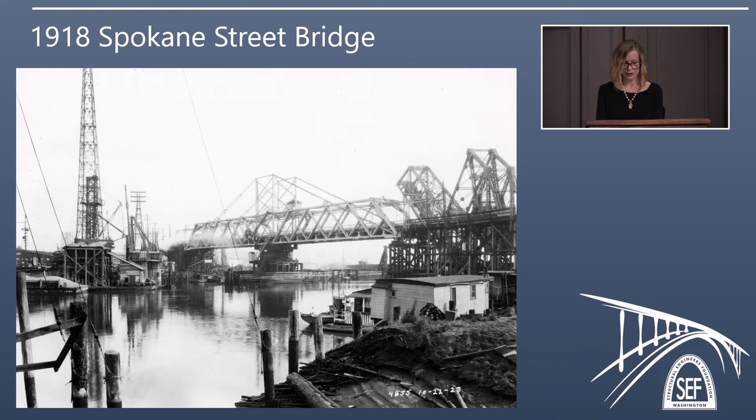This and the 1911 bridge handled the traffic pretty well. And in 1921, ferry service stopped. Growth was continuing. Traffic got very, very bad. So the calls for a high bridge were really reaching a fever pitch. However, the city again turned to bascules. And in 1924, they built the first of the two Spokane Street bascule bridges. And the second was built in 1930, and once they were both in place, they each carried directional lanes.

And they served pretty well, but by the 1970s, traffic had gotten very bad again, and renewed calls for the high bridge once again came about. And funds had been approved in '72, but it was the 70s. Boeing bust, all kinds of things contributed to it not being built. And in 1978, when the mayor suggested refurbishing the old bascules, West Seattle was threatening to secede. It was very serious. It was getting ugly.

And then an inebriated 80-year-old freighter pilot rammed into the north span in a freighter that had 20,000 tons of gypsum, and so it damaged it beyond repair. It was stuck in the open position. And because it was not fixable, it qualified for federal funding. So West Seattle was finally going to get its high bridge after over 60 years of asking for it.

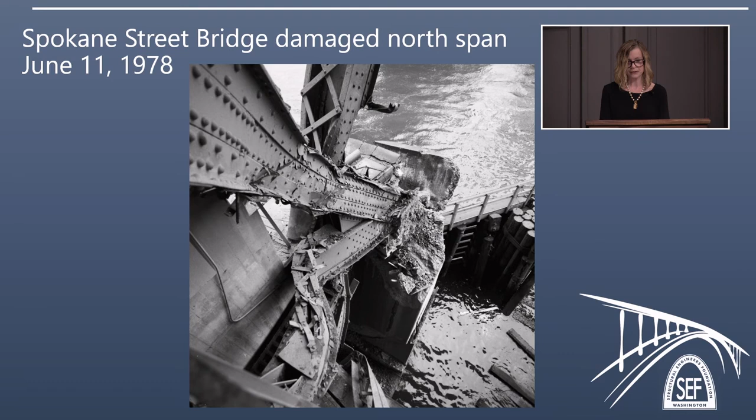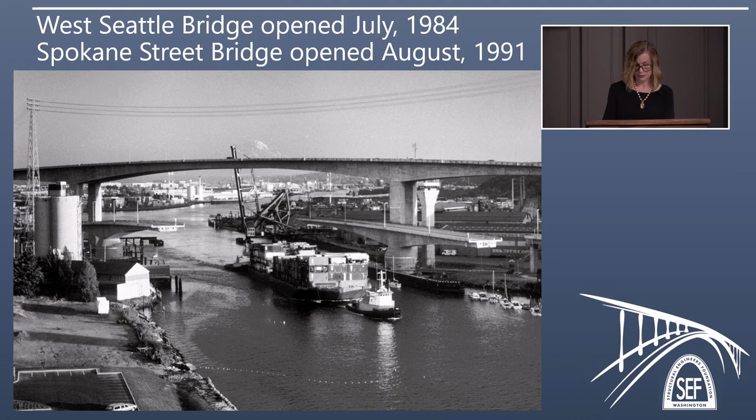And the low bridge is actually a pretty innovative bridge as well. It is the only concrete swing span in the world and the world's heaviest moving structure. And it was awarded with an outstanding achievement by the Society of Civil Engineers. But you have heard lately about the bridge giving us a bit of trouble, so I will hand it over to John to discuss that.

Thank you, Maureen. Don't like to be the one who has to deal with trouble, but there we are. Let's go back to the good end of it when they were building the West Seattle Bridge. What they were faced with was the problem of building a bridge with a fairly long span, 590 feet for the main span, and about 375 each for the two side spans. They went with pre-stressed concrete construction. They actually had an option for doing steel or concrete, but the steel one came out to be quite a lot more expensive, and so economics dominated, and they built the concrete one.

Then again, the question is, how do you build it over an open waterway when you cannot put falsework down there? And we're back to our old friend, the cantilever construction. And here it's called balanced cantilever construction. So it's a very slight variant on what you might otherwise have seen. It's a terrible name because at no stage is the construction balanced. It is always unbalanced, but we'll have to forgive the engineers for getting the wording wrong. What you do is you build two columns, and they're big columns. They're 12 feet by 17, I think it is, square.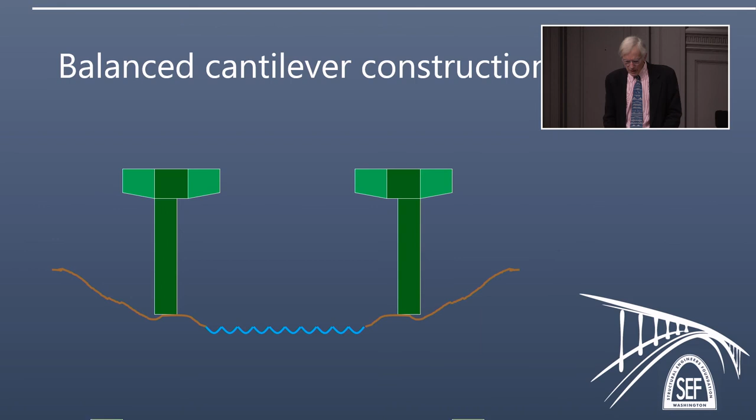And then you come along and you build a small portion of the deck structure, which is a big box, and you push it out so it's a little bit eccentric. So in this case, both pointing towards the middle. Then you build another one on the outside, which again makes you about half a segment eccentric towards the outside. So now the columns are bending outwards. So now you put another one on the inside, and now the columns are bending inwards. So you keep on putting pieces on the outside and the inside, always keeping the column very slightly unbalanced because you really can't do anything else. And then finally you do what they call a closure pour in the middle where you connect the two up.

Now, when you're building these things, you might ask, well, it's okay to just show the pieces flying up in the air. How do you stick them on? Well, the answer is you go back and you do the same operation of pre-stressing that we saw before. When you put the piece on and you're holding it up there with a crane, then you put a cable through, you anchor it one end, and you put a jack on the other end, and you pump up the jack tight, and you stress that cable. You come in and put an anchor on at the jack end, and then you drop the jack in the water and throw it away. And what you're left with is all these pieces which are squeezed together by these cables under high stress. And again, think of the rubber band.

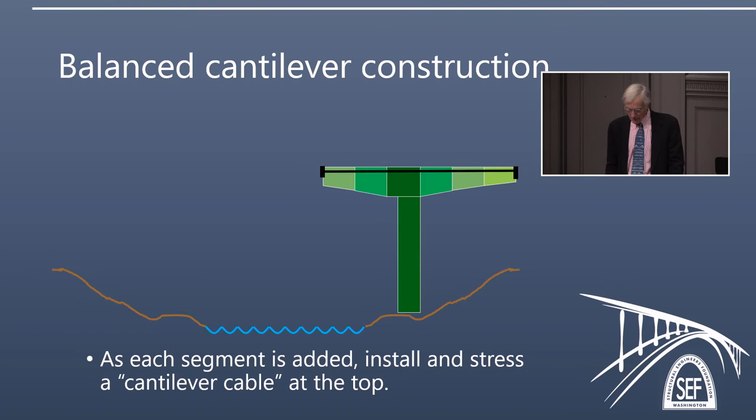You can actually do it two different ways. One is that you can cast the pieces in place by putting a new form at the end, carried on a crane or false work. You can either cast them in place, or you can ship them in on barges as prefabricated, precast pieces, and then you can lift them up with a crane. And typically today, if you've got a big enough bridge and it's worth making a special casting yard, then the precast is probably the way to go because it's a little easier. But the West Seattle Bridge was built by using a cast-in-place technology.

Just a couple of drawings, just to show you what the drawings for these things look like. And these are the drawings from the original bridge. And these are all hand-drawn. And so you can see the fairly elegant handwriting on there. These guys really took care with their handwriting. This is the bridge in elevation. You see the big main span and the two side spans. And the kind of box thing in the middle is just a drawing showing this is the navigation clearance that was required by the Coast Guard.

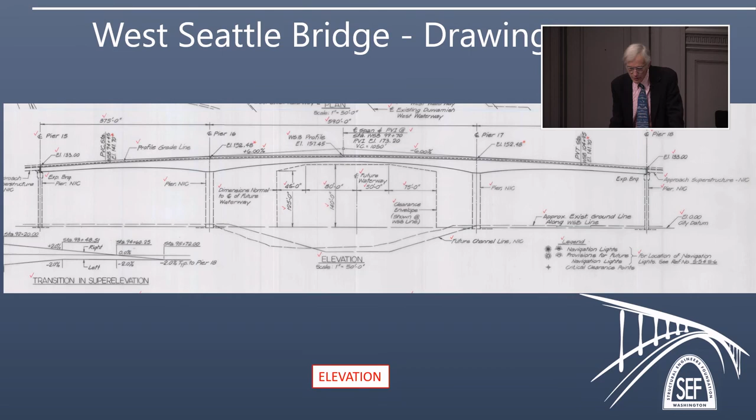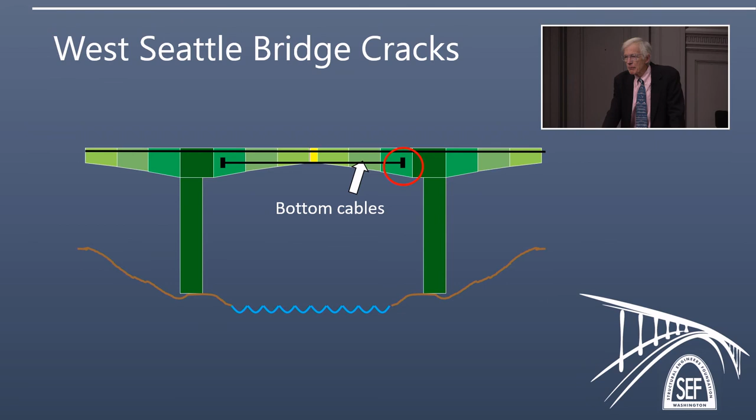What's happening now? Well, where the bottom cables end, there is an anchor point, and it's been circled in red there. And if you look at the bottom of the bridge, what you see is some cracks which are emanating kind of diagonally, and they happen to start exactly where the anchor for those bottom cables ends. And what has happened is that the forces from that anchorage are very large, and some of the other forces in the bridge have moved around a little bit thanks to creep in the concrete. And the result is that there are cracks which emanate from that bottom anchor point. And that is what is causing all of the problems today.

So, in fact, but for a very small change in the original design, we would not be having any of the problems today. The rest of the bridge is in fact in remarkably good shape, considering it's 37 years old.

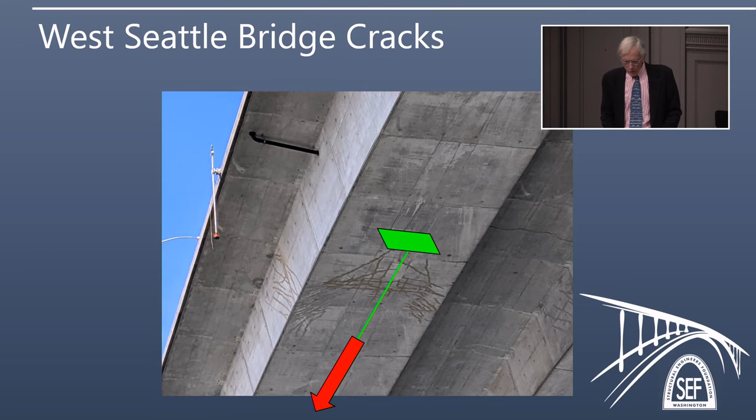So I think the last question is, where do we go from here? What is the future of bridge engineering, and where are we going to go with it? Well, I think the first thing I would say is Washington State will continue to lead the way in innovation. And if you look back at history, you say we can boast the first ever floating bridges, and at the time they were the only floating bridges in the US. Thank you, Homer Hadley.

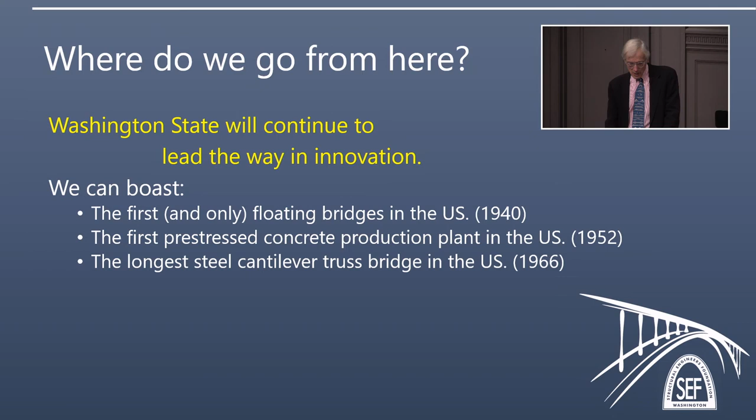We can boast the first pre-stressed concrete production plant in the whole country. Thank you, Art Anderson and Brother Tom. We can boast the longest steel cantilever truss bridge. This is the Astoria Bridge over the Columbia River. It's the longest in the US, and it's still true today.

We can boast the first cable-stayed bridge. Thank you, Arvid Grant, for bringing it to this country, the first one in the US. We built a major suspension bridge, which is pretty rare these days, and that is the second Tacoma Narrows one.

And about a month ago, we just built the longest pre-stressed concrete girder that has ever been built in the world. Thank you, Concrete Technology Corporation. It's now over I-5 just outside Tacoma in a bridge there. So I think we've got a pretty good history of innovation, not just in the state, but in this country.

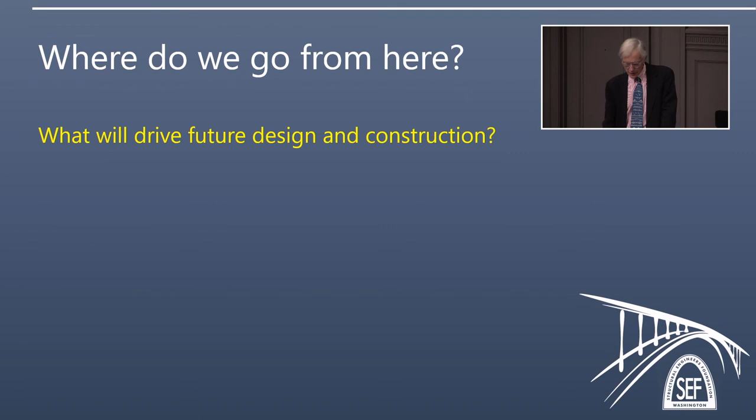Then you ask, well, what do we think is going to drive the future in terms of design and construction? What are the big forces which are acting on us? Well, I think anyone's crystal ball is probably as good as anyone else's, but the ones I would say are things like congestion in urban areas is getting worse and worse. And the result is that it's very difficult to build a bridge over a highway and put a column down wherever you want to, in the middle, to make two short spans, because that column will probably block off traffic somewhere on the highway below.

So what you then wind up doing is just building longer girders. It also means that we have to use what we call accelerated bridge construction, which are techniques whereby you can try to reduce the amount of time that you spend on site, perhaps at the expense of a bit more preparation time up front, because that reduced site time will then help with the traffic congestion.

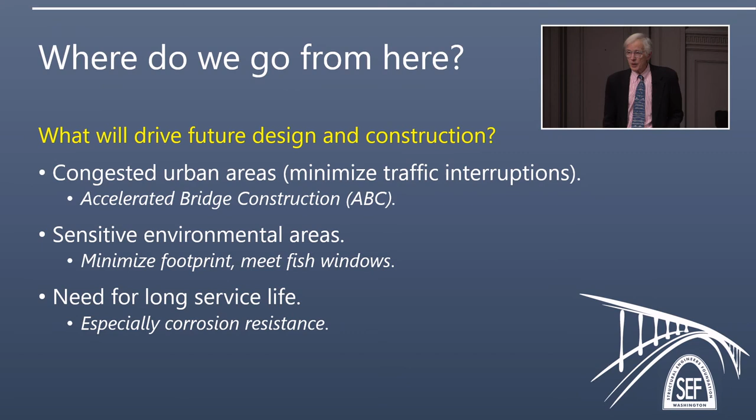Sensitive environmental areas we are much more sensitive to today, and again, these typically do the same kind of thing. You build bigger, longer bridges so you can jump over a sensitive area rather than having to put a column down there. The need for longer service life. Corrosion has always been a problem, and this will continue to be a problem. We're always looking for ways to slow it down.

What tools do we have for innovation? Well, we've got new materials. We're always trying to make materials which are stronger, which are lighter, maybe more corrosion resistant. Things like carbon fiber were incredibly expensive only 20 years ago. The price has come down. It's being much more widely used now. Very, very strong stuff.

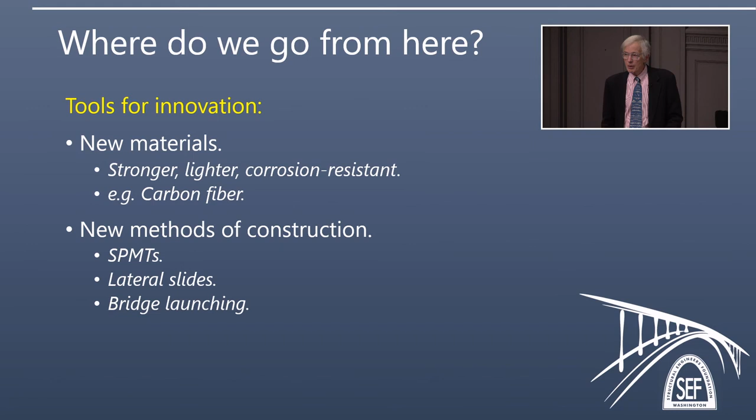New methods of construction, things called SPMTs, which we'll see in just a second, lateral slides, which we'll see in a second, and bridge launching, and we'll also see an example of that. And then I think we should add in computer technology, which is allowing designers huge extra openings in that they can deal with difficult geometries, which were never possible before, difficult stress conditions, earthquake conditions, and it's made a huge difference to what we can do.

And the way you build a bridge fast with these things is you find a field close to where you want to put the bridge, and you build the bridge in the field. And you're disturbing no people, just cows. You then go in with the SPMT, you pick it up from the field, and you go down the highway. You drive to the final location, and you set the bridge down. And then you go home.

And the state of Utah has made extensive use of these things, and they've been able to replace a bridge over the freeway there in a weekend. They closed the freeway for a weekend, put the new bridge in, and then go away. And the first time they did this, they had something like 10,000 people come out to watch, just because it was such a spectacle to see this happening.

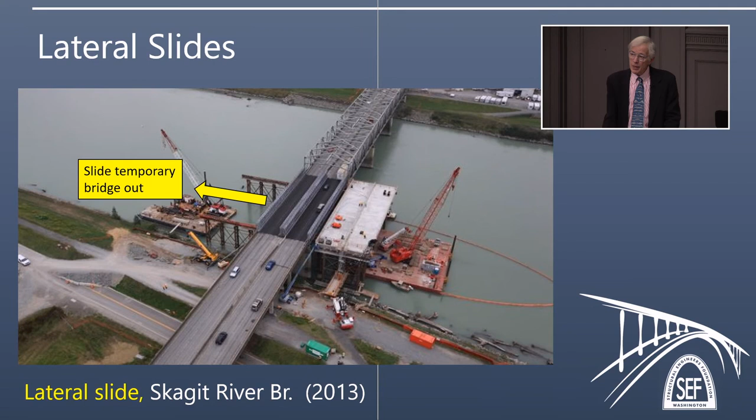Then what you do when the time comes is that you slide the existing bridge out on the skid bent, going to the left. Having slid it out, you then slide the new bridge in from the right. And this bridge was done in a special contracting procedure with WSDOT, who reckoned that the price that you offered for the bridge would be added to the time that it would take for I-5 to be closed. And they were charging something like $1 million a day to be added to your contract price for the bridge to be closed.

And the company who won this was called Max Kuney Construction, and they sat down and worked out that the cost of closing I-5 was a huge part of the total cost. So they worked out a way to close I-5 for the very minimum possible time. And I think I'm right in saying that they closed I-5 for a total of 13 hours, just overnight. And they got the old bridge out and the new bridge in that time.